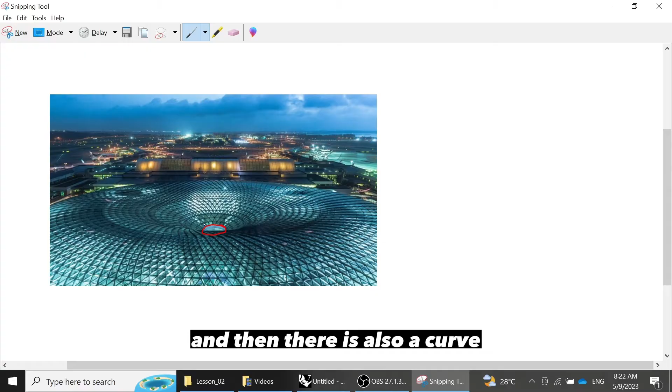So this is an image of the Jewel Changi Airport, and let me just draw the constituent parts of the geometry that we will set up. You can see here in the oculus there is a circle, and then there is also a curve that determines the shape.

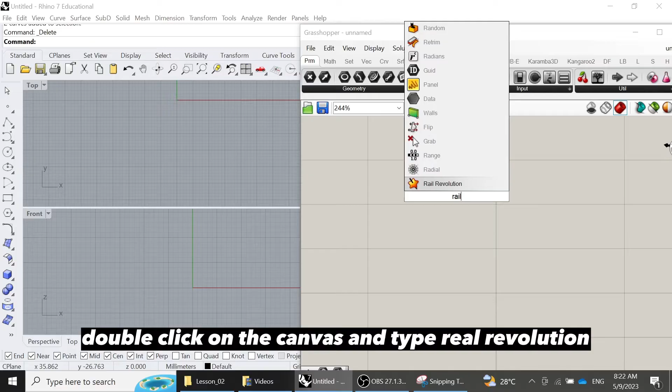We will need to also establish the axis of this geometry called rail revolution. So if we go to Rhino, Grasshopper, double click on the canvas and type rail revolution. So this is what we have. If you don't see all these exact names, you can go to display, click on full names. So this is much more intuitive for you to understand what you need.

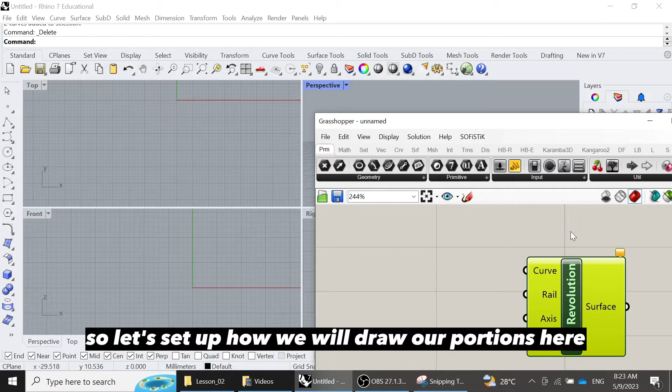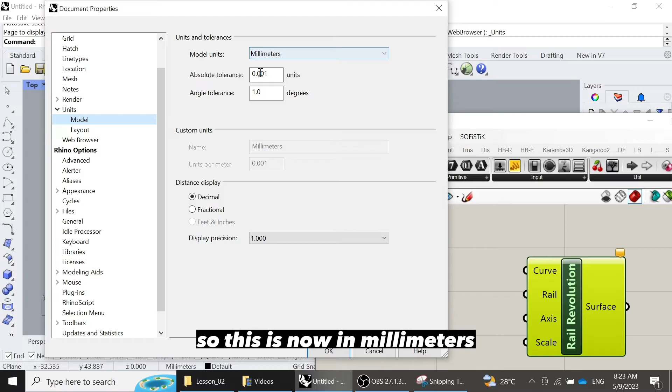So let's set up how we will draw our portions here, the curve, rail and axis from this particular sketch. So you can go to here, top view. Make sure that you are in the correct units. So this is now in millimeters. I'm going to put the tolerance to 1.

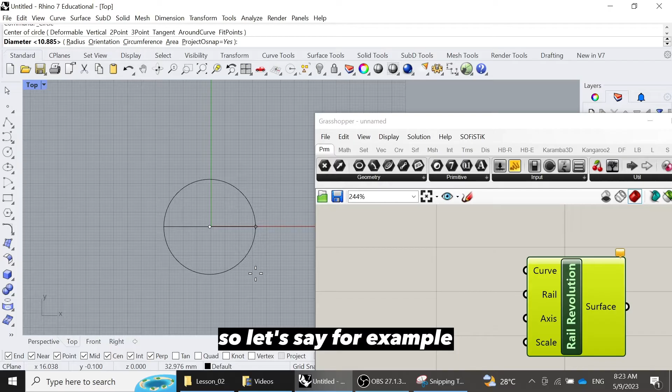Okay, so now say for example, I'll just draw a very small version of the Jewel Airport. So let's say for example now I've used this tool to create a circle, and the diameter here, let's maybe set it up as 10 meters, which is 10,000 mm. Okay, so this is the circle.

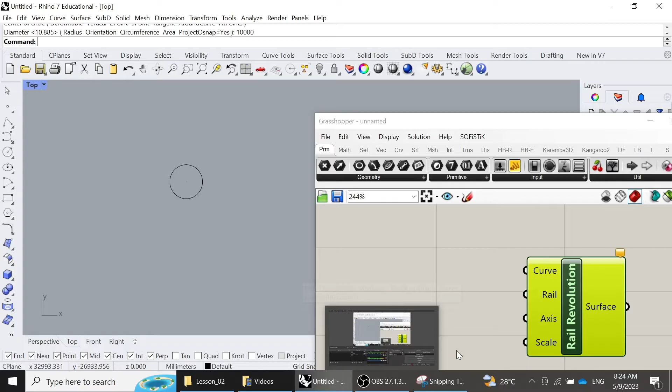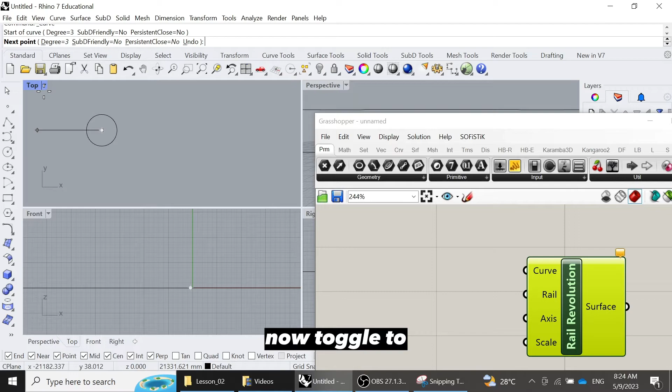Then the next thing that we need is the rail, right? So to draw the rail, first go to this command here, control point curve, and you should try to make sure that it will be able to snap to the center. So go to the edge of the curve, and then when this comes up, just click over here. Now toggle to, say for example, the front view, zoom out with your middle mouse button, and now we can determine the dimensions.

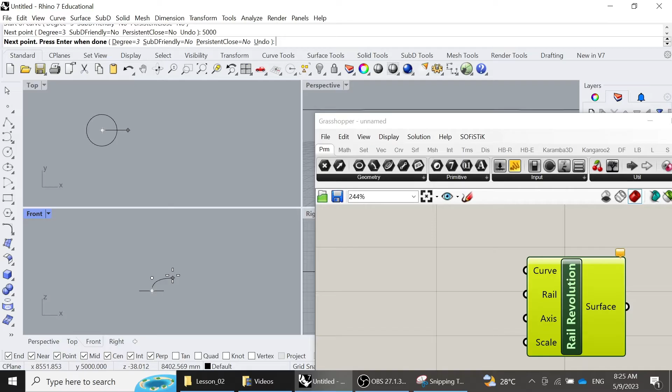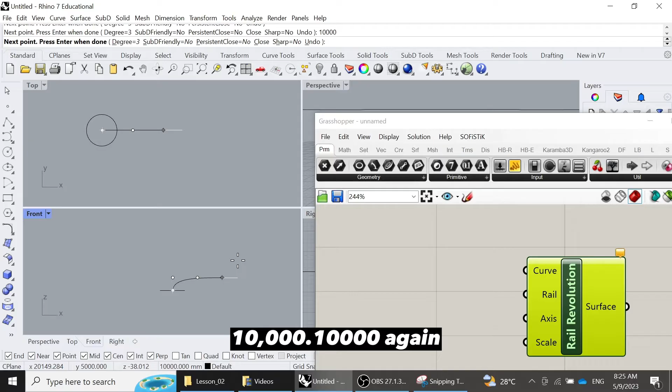So maybe let me set it as 5,000. So this is the first point. Let me zoom out a bit more, and maybe here I will just put another 10,000, and then say another 10,000 again. Click to complete the placement of the 10,000 point. So 10,000 again, then maybe another 10,000, enter, left click, and then now I will move it, say

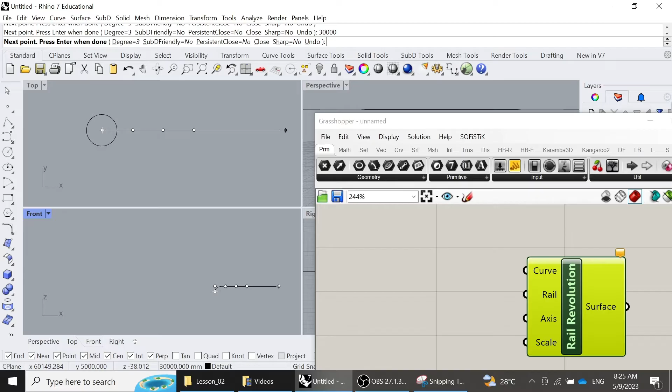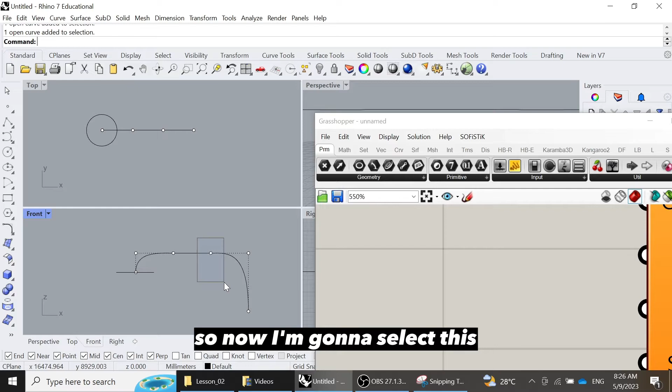30,000 down, left. Okay, that's too much, maybe 15,000. And make sure that it's going down, then just left click and enter again to complete the command. So now I'm gonna select this. I shall try to move them down just to make it smoother.

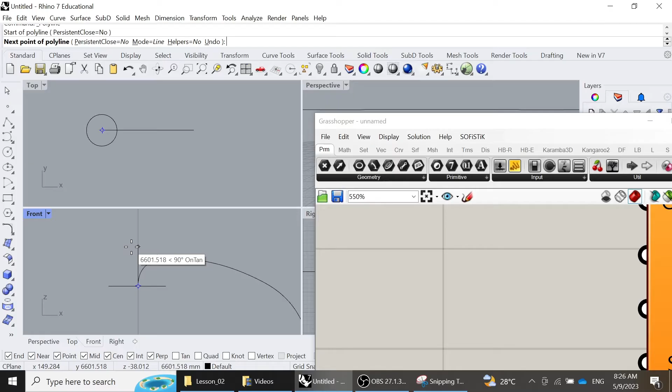Okay, so if you're happy with this, now let's create the axis. So the axis, click on the end point here and just make it go up. Okay, so this one we don't have to be precise because this is just showing the axis.

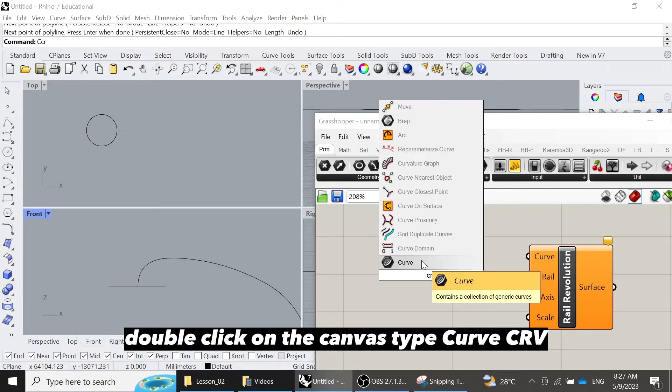So now that we have this, we just go back to Grasshopper, double click on the canvas, type curve, CRV, and we're going to duplicate it 3 times because we're going to have a curve each for each of these input parameters. So this is my rail, then I right click, set one curve. This is my curve profile, and then finally this will be my axis.

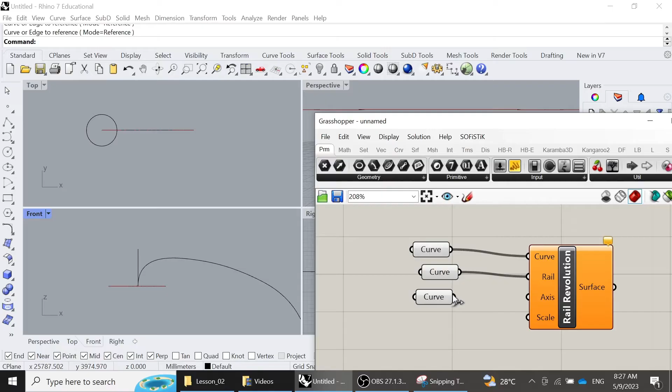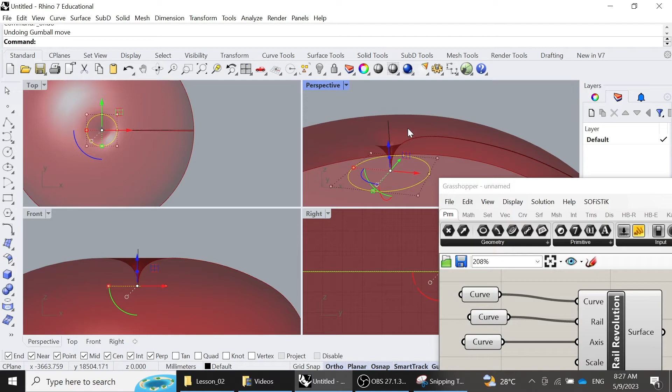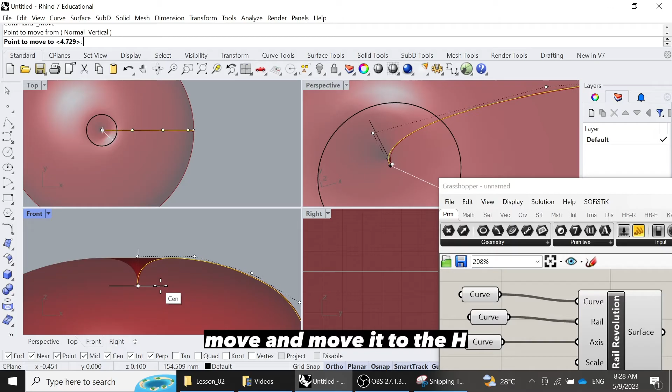And yep, so let's just zoom out. So you can see here that this is a little bit fuzzy, right? Because you can see that the dip here is a little bit small. So to fix this, we just select the whole curve, move, and move it to the edge. Then you can see that it works.

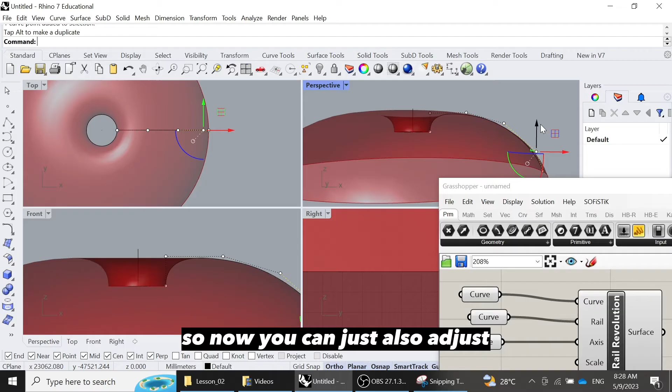Okay, if just now you didn't have the control points on, you can always press on F10 to toggle the control points. So now you can just also adjust to get the shape that you want.

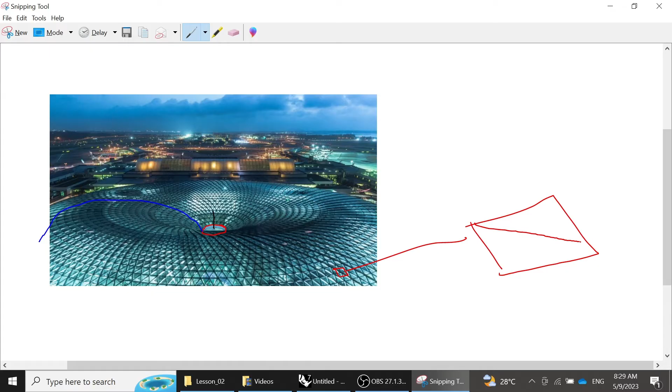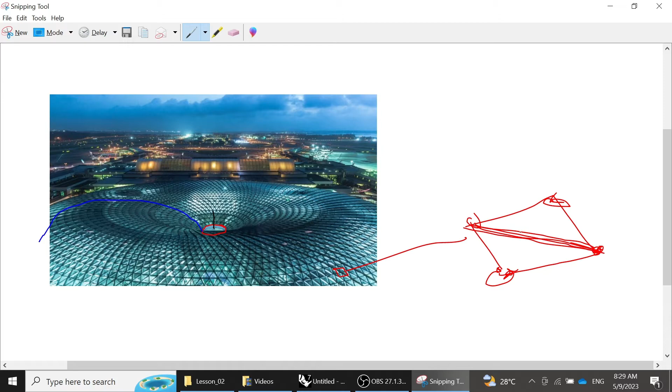So now what we're gonna do is we will take this and create the diagrid. Let me just draw. So you can see from here, if I were to extricate this out, what is happening here is there is a square, so to say, and then a diagonal portion here. So we're going to introduce some tools that you can see from Grasshopper that allows you to establish points here. And then what we will do is we will draw a line and a line and a line here between these points.

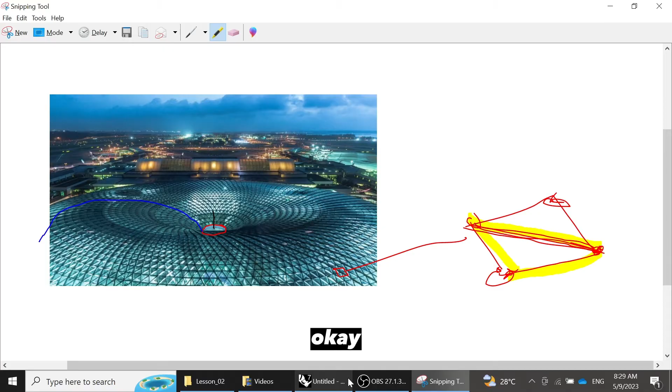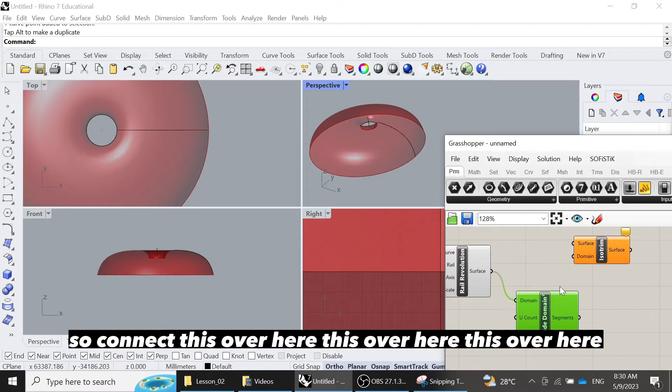Okay, so how are we going to do that? We can use what we have learned in the earlier tutorial, the Boxmorph tutorial, you can go and watch it. Now we will use the divide domain tool as well as the isotrim commands. So connect this over here, this over here, and this over here.

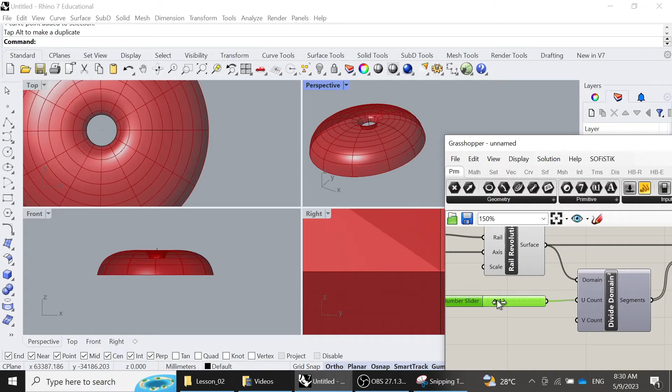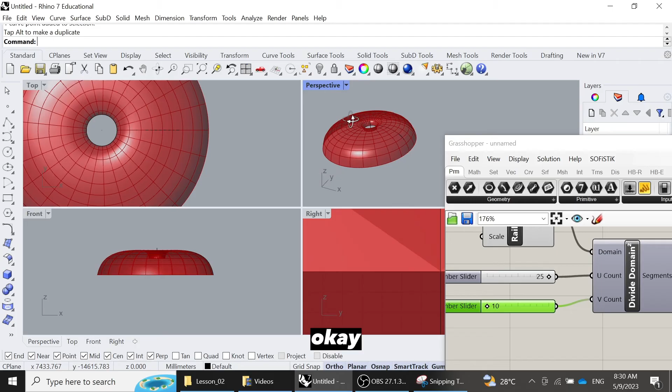Okay, so now let's set up the U and V counts. Maybe say for example from 10 to 25, and I can adjust this. Maybe something like 25. I'll duplicate this and place this here, and maybe this one I'll reduce back to 10. Okay, so this looks okay for now.

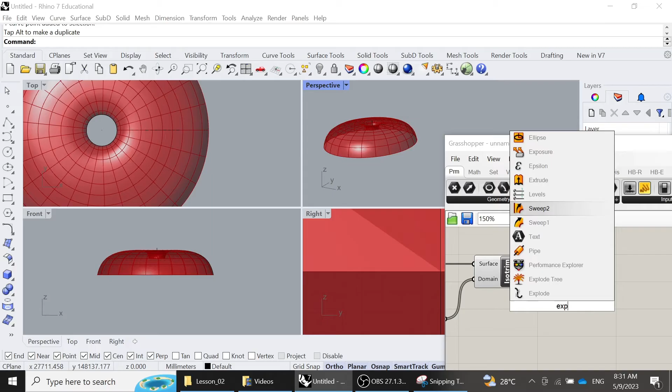So what we want to do is to be able to establish this quads with the points. To do that, we will need to use this Deconstruct Brep command over here. Just type brep, then connect this over here. So what this does is it gives you the faces, the edges, and the vertices.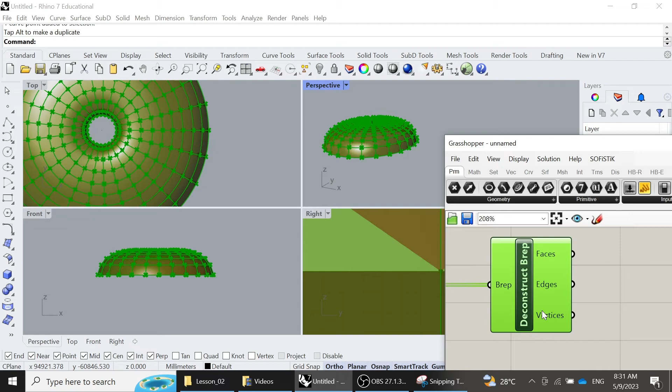Okay, so let's use this as an opportunity to identify which are the points, because this will be useful for you in future when you want to customize how each of your components will work.

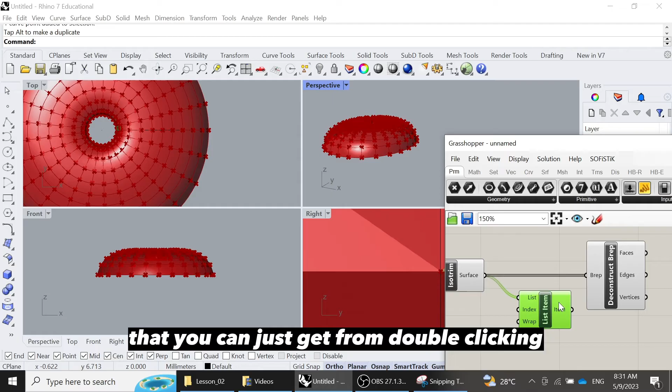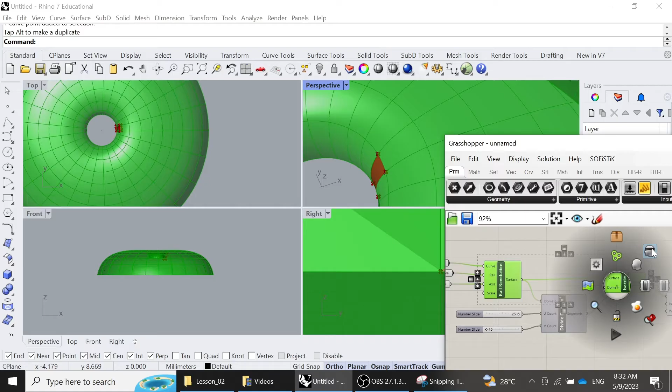So I'm going to use this list item command that you can just get from double clicking and typing list item, and I want to focus on just one item, the very first item, which is this guy. So I'm gonna select the rest, which is this isotrim as well as this rail revolution, by holding onto shift and middle mouse button and hiding them. So what this does is that it will take whichever item it is and only display that item.

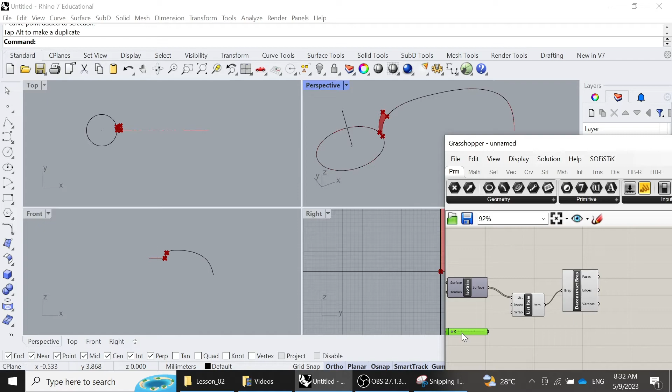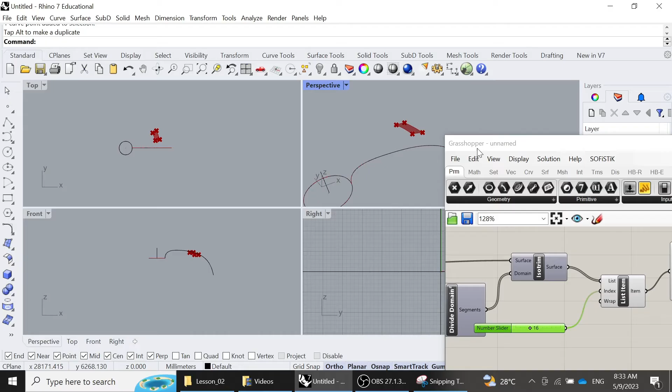So I can just create a slider, say from 0 to 50, and I'll plug this in. So if I scrub through the slider, it's going along how it's constructing the original surface that we have. Okay, so you can see that Grasshopper understands it in this kind of motion.

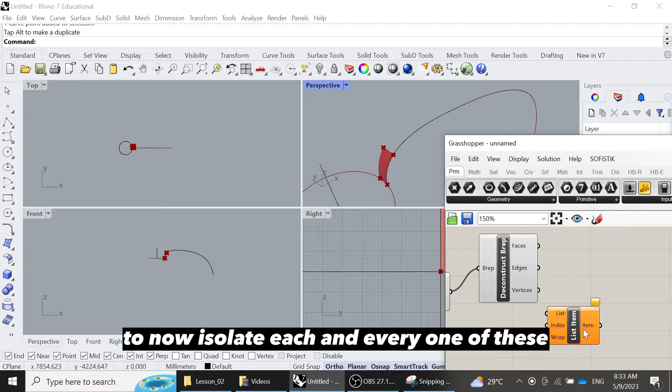Okay, so this is just to illustrate. So let's just focus on this particular panel that we have. So we have our vertices here. I'm going to use the same command called list item to now isolate each and every one of these points. So immediately after I've done this, you can see that this is like 0.0. If I hover over this, this is 0.0.

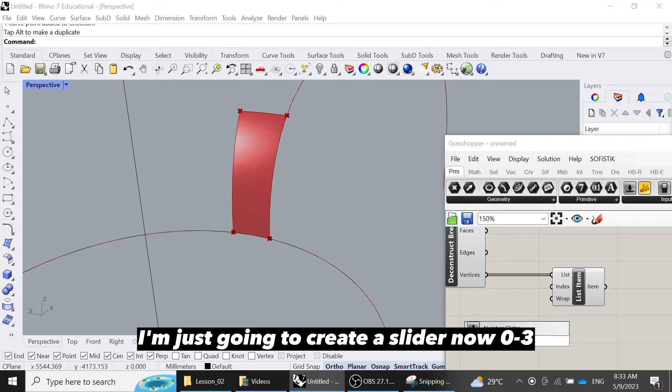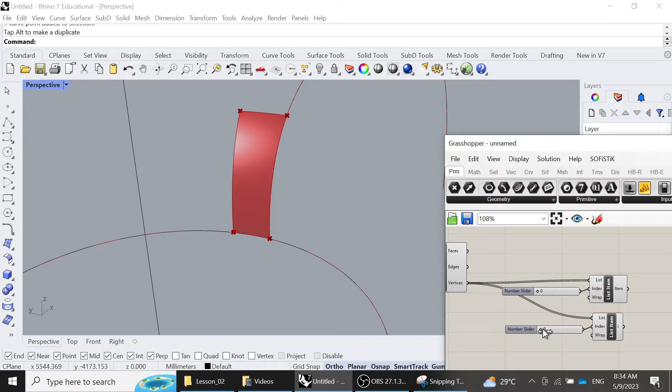I'm just going to create a slider now from 0 to 3, because I know that Grasshopper always counts from 0. So this is in fact the first point that we have isolated. And I'm going to select this, Ctrl C, Ctrl V, move this up, and you can see this is 0.1 now. Let me just do it a few more times. Two, three. So you can see this 0.0, 0.1, 0.2, and then 0.3.

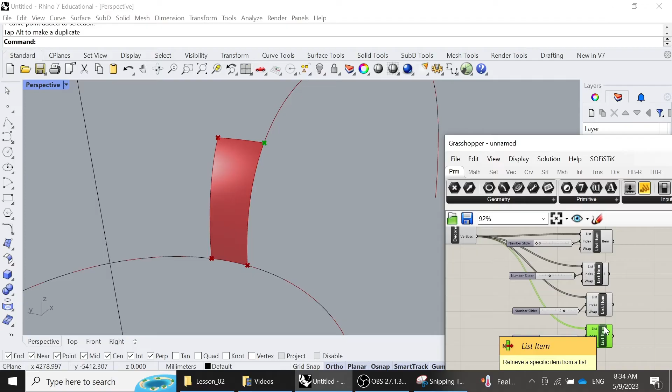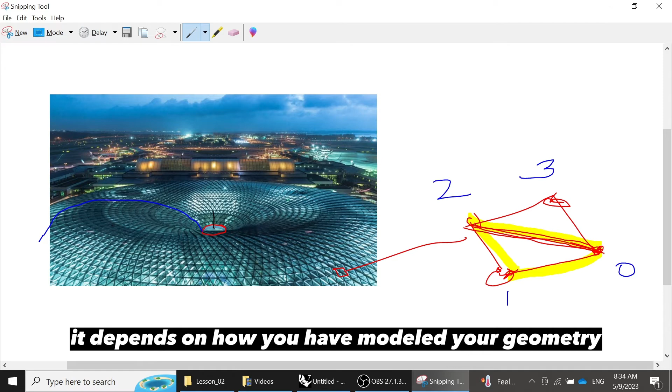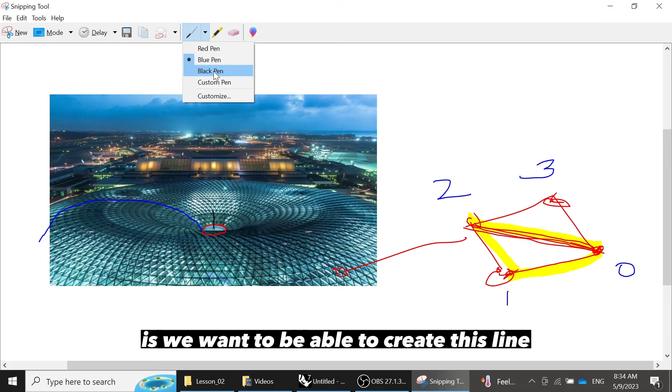So if I were to go back to this particular sketch, it's 0, 1, 2, 3. This order will not be the same for all geometries that you make. It depends on how you have modeled your geometry. But the concept here is that what we want you to do is we want to be able to create this line from point 0 to 2, and then from point 1 to 2, from point 0 to 1.

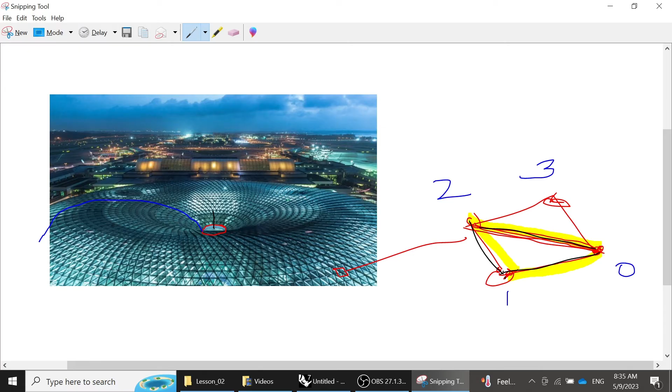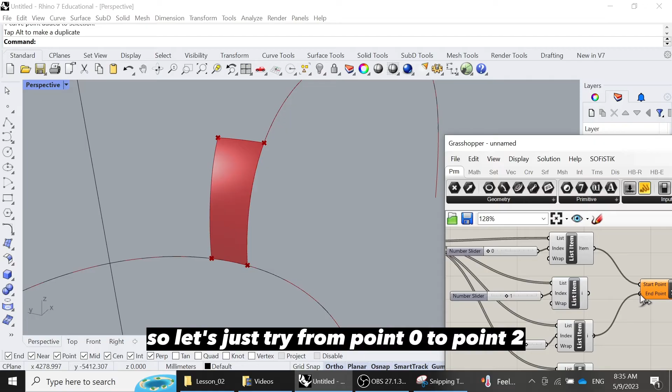Okay, so now let's just use the line tool. Choose the second last one where you will see the start and the end point. Let's just try, it's from point 0 to point 2. See, it immediately draws this line. So what else do we need? From point 0 to 1, and then from point 1 to 2.

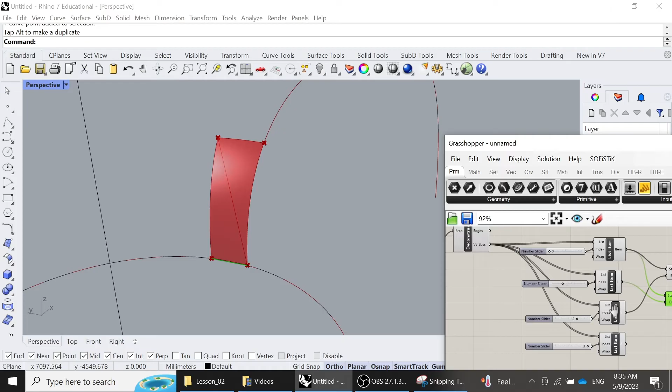So I'm gonna take this, Ctrl C, Ctrl V. So point 0 to point 1, I'll just replace the endpoint with this. So you can see this is my point over here. I can also just hide these two things so it's easier for you to visualize. Okay, so now we only see these 4 points. This is point 0 to 2, point 0 to 1.

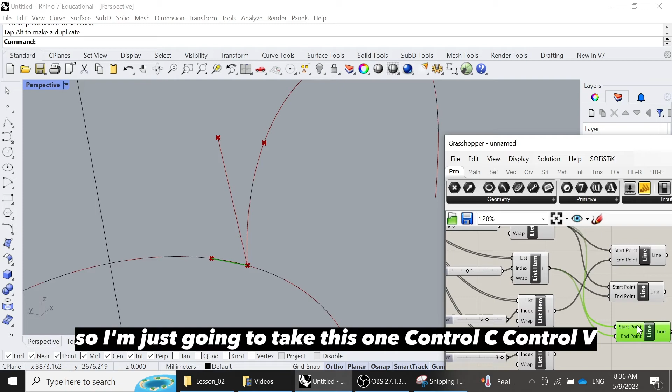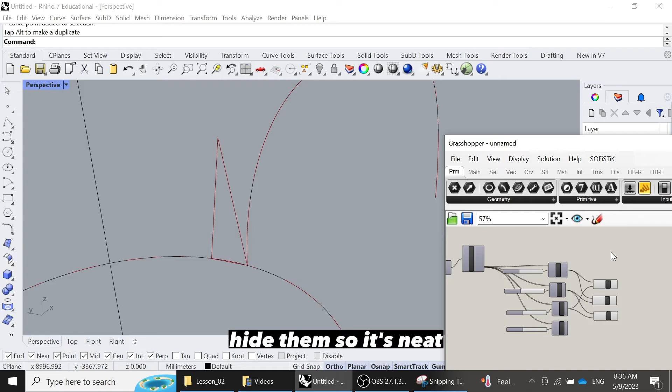So the last one is from point 1 to 2. See, point 1 to 2. So I'm just going to take this one, Ctrl C, Ctrl V, and I'll just replace the inputs point 1 to 2. So we have this to all of this. So now that I have this, I don't even need these points. I'll just select them, middle mouse, hide them. So it's neat, I have all these lines now.

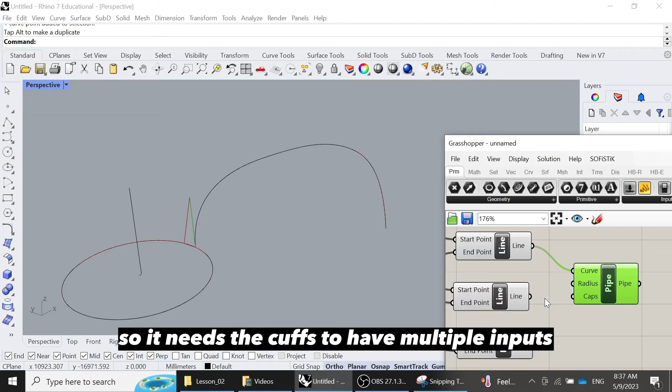So what I just need to do is to make them 3-dimensional. Double click and type pipe. So it needs the curves. To have multiple inputs, just hold on to shift and drag and connect them.

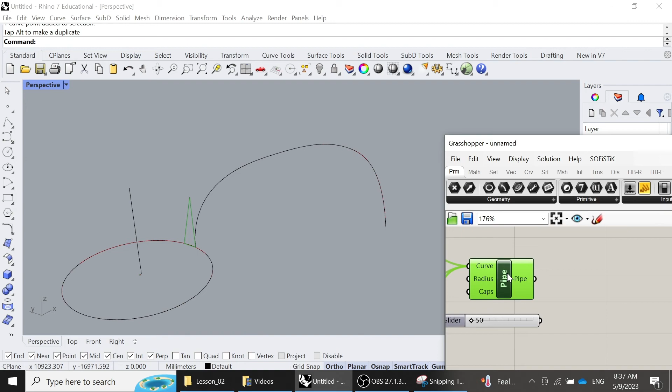So the default number is 1. For this to look good, maybe let's start with 50 mm to say 250 mm. Let me just bump it up a bit. Okay, 100. Okay, so are you generally happy with this?

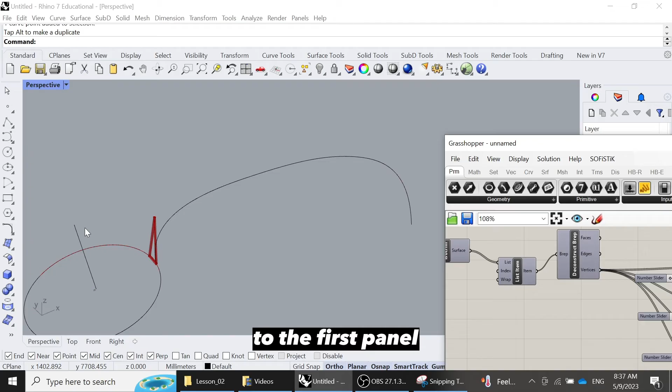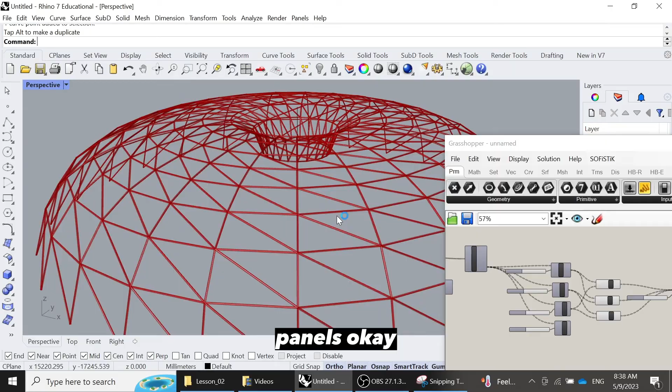So what's happening is that you are doing it to the first panel. But if I were to change this now and flip it over here, you can see that now I'm using the same algorithm but generating it to all the other panels. Okay, and so this is how you have very quickly created the jewel structure.

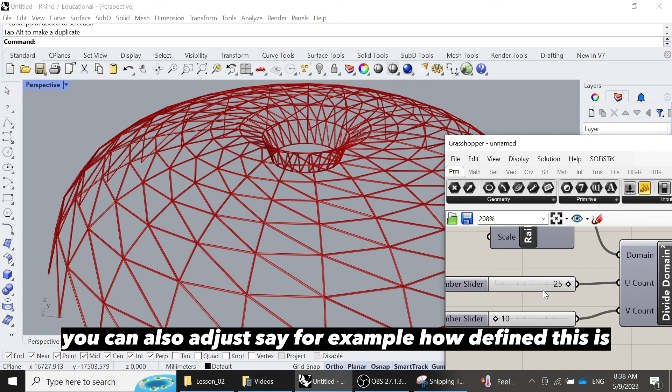This is all parametric in the sense that you can control the thickness of the members, right? Put it back. You can also adjust, say for example, how defined this is. So maybe I'll just edit the slider, bump it up to 50. I hope my laptop can take this, so I can just change this to say 35 now. So now it's more defined, maybe even up to 50. Yes, so this is looking more and more like what we have in the jewel.

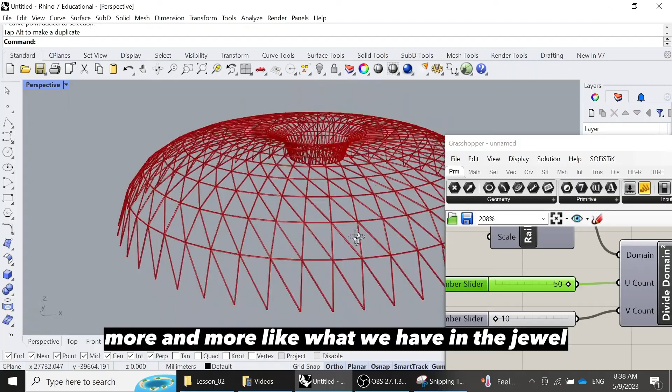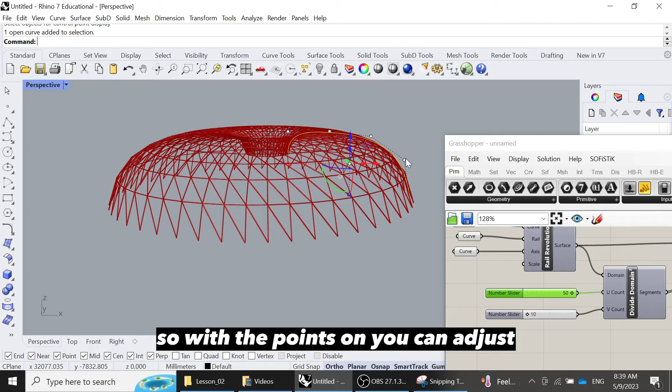You can also go back to your constituent parts from Rhino to smoothen up the geometry. So I can select this, select the curve first and press F10 or type points on. With the points on, you can adjust, select the points and adjust the geometry like what I've done. You can bump it up here, okay, to make it look more stadium-like.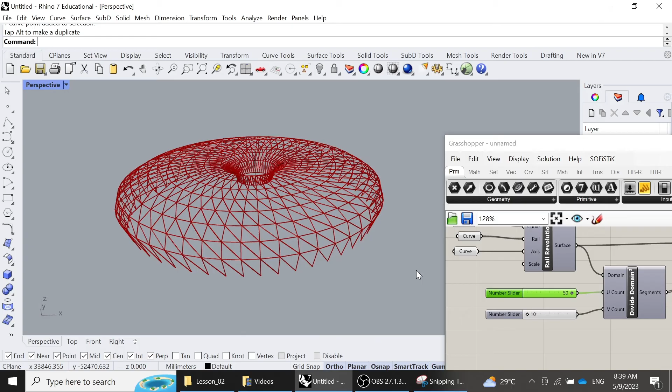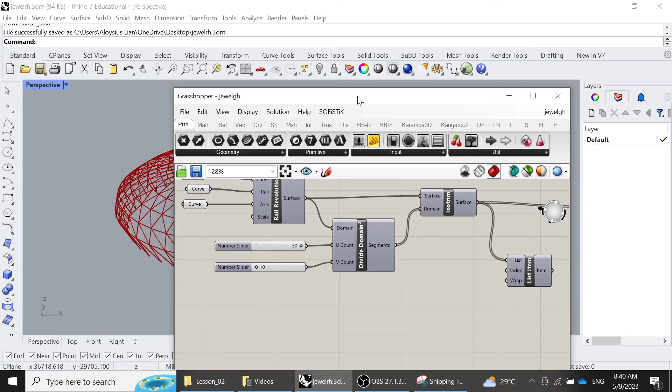Okay, yes, so now let's just save this document. Let's just call this the jewelgh. I'm also gonna save my Rhino file. jewelrh. Create a new layer here. Let's just call this bake, and you can bake your geometries.

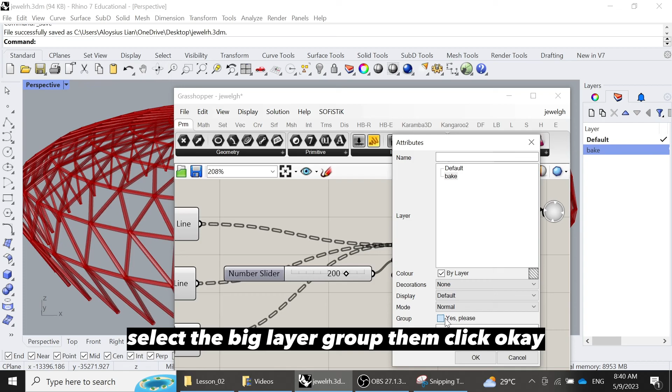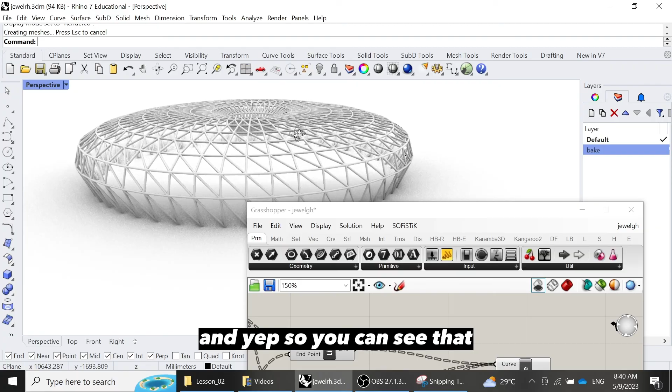So my structure looks a bit too fine. Let me just bump it up, double the radius. Okay, so this is 200 now. Right click, bake, select the bake layer, group them, click OK, and that's it. So to switch off the grasshopper geometry, just click on this particular button, so you're hiding that. Go to perspective, switch it to rendered, and yep, so you can see that you have baked your geometry now into Rhino.

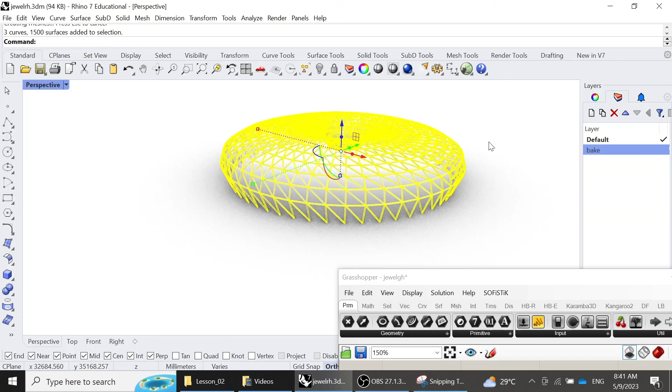So with this tool, you can do your renders. You can even create diagrams out of this. So say for example, I want to do like an axonometric of this. Okay, so for axonometric, you go to set view, isometric, like, okay, this view.

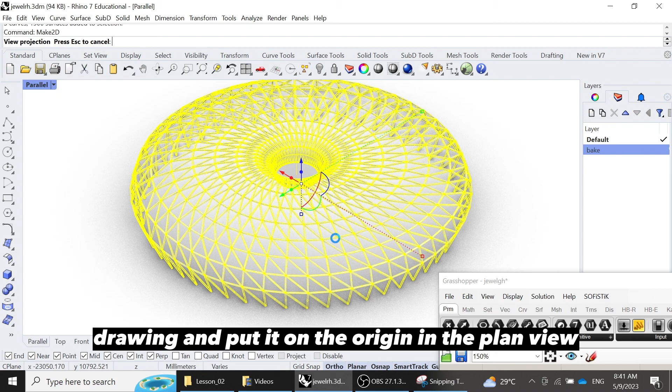Okay, so I'm just going to select all my geometry and then type make 2D. You can use the same options, just click OK. And what it will do, it will make a two-dimensional drawing and put it on the origin in the plan view. And then you can use this and adjust this within Rhino itself, or you can also export it to another software such as AutoCAD or Illustrator.

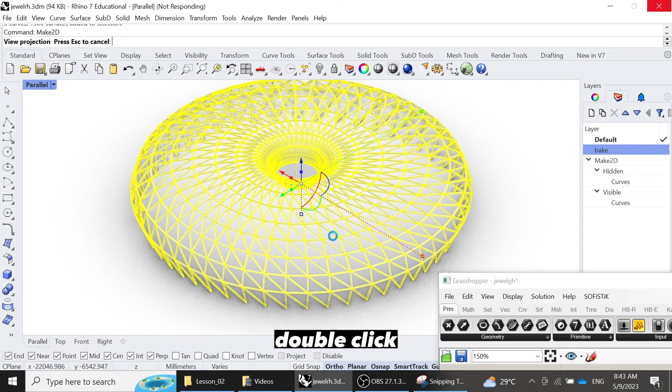So there's quite a few geometries here, so we have to wait for it. Okay, now it's done. So let's just double click and go back to the top view. Make sure you don't click anywhere on the canvas first, because it's still auto selecting whatever that you have drawn. So after you go back to the top view, you can move it over here, so it's away from your original 3D geometry.

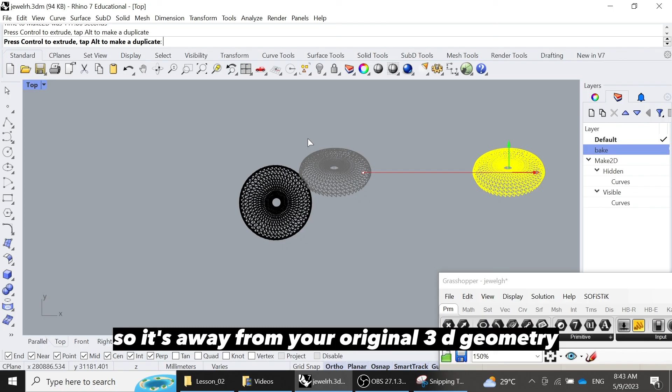And yep, so now this is all good. This is your little diagram that you can use to fix and for your 3D representation or drawings.